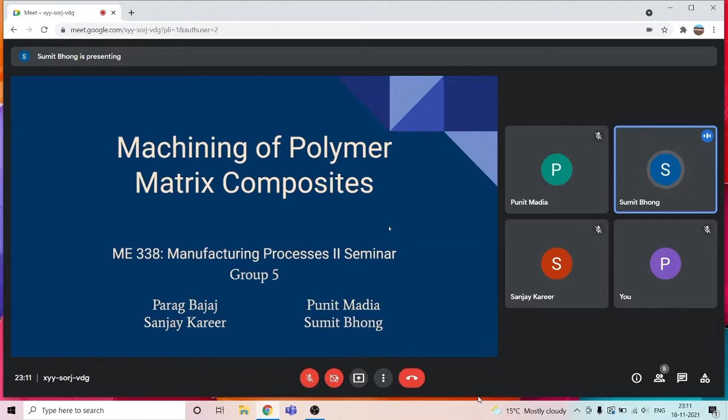Hello everyone, we are Group 5 and my name is Sumit Bhong and my teammates are Parag Bajaj, Punit Madia and Sanjay Kareer. Our topic is machining of polymer matrix composite.

So first of all, let's see what is polymer matrix composite. A polymer matrix composite is a composite material composed of a variety of short or continuous fibers bound together by an organic polymer matrix. PMCs are designed to transfer loads between fibers of a matrix. PMC matrices are typically either thermosets or thermoplastics.

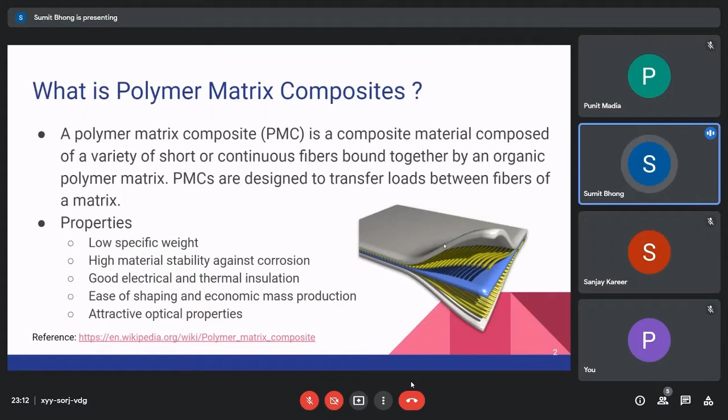PMCs are widely used because of their properties such as low specific weight, high material stability against corrosion, good electrical and thermal insulation, ease of shaping and economic mass production, and attractive optical properties. Now, let's take a look at some exciting real-life applications of polymer matrix composites.

PMCs are used in aircraft and aerospace industry to reduce aircraft weight, which can improve its performance and reduces its cost. In biomedical industry, it is used to manufacture various equipments such as medical implants, orthopedic devices, MRI scanners, and prosthetics, etc. Since polymer matrix composites can withstand extremely hot or cold and other hazardous conditions, they are used in the manufacturing of protective equipments. Some such equipments are shown in the figure below.

PMCs have many industrial applications such as making chemical storage tanks, pressure vessels, valves, impellers, and blades, etc. Polymer matrix composites are also used to repair bridges and other construction materials and equipments like booms and cranes. As shown in the pie chart, more than 50% of material used in aircraft is made up of polymer matrix composites.

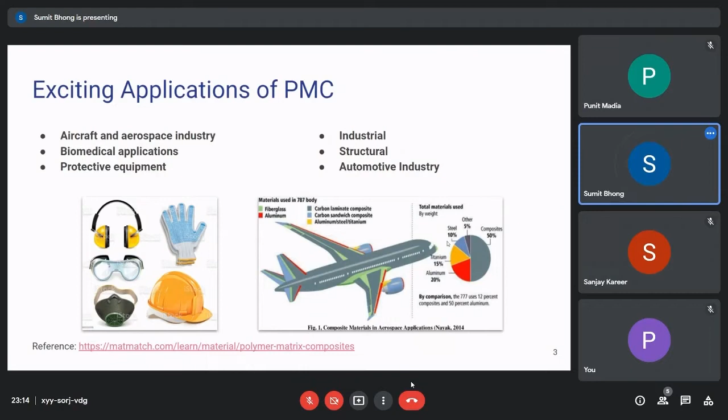Now, let's see some machining techniques for polymer matrix composites. Conventional methods such as turning, drilling, and forming can be used for machining of PMCs, whereas non-conventional methods like abrasive water jet machining, which is currently in use, laser machining, and electrochemical discharge machining is the exciting future trend. Details of these processes will be explained in the upcoming slides. Now, my colleague Punit will take over.

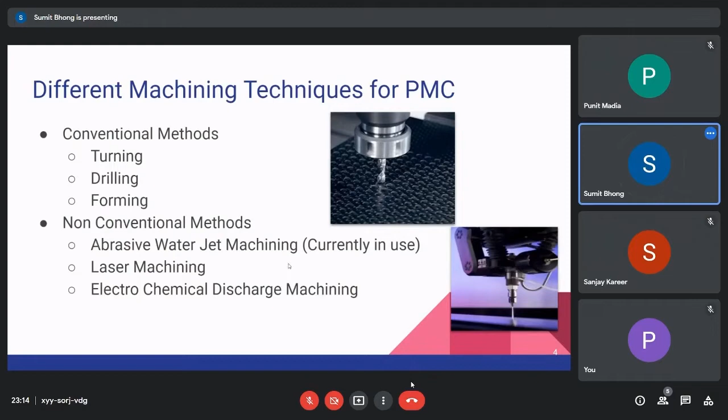Thank you, Sumit. Now I'll talk about PMC usage in automotive industry. To make electrical tape, we use extrusion and rolling as conventional machining process. These tapes are pressure sensitive and designed to protect electrical connections. There are different types of tapes. Masking tape is designed to cover and protect surfaces during painting and repair. Double-sided tape: most factory vehicles use foam-lined tape for emblems, trim, and even securing body panels. Self-vulcanizing tape: it is great for sealing electrical wiring and plumbing.

Now, speaking of automotive thermoforming, automotive thermoforming is the act of heating a single plastic sheet until it is soft and malleable enough to form or shape around a custom designed mold or tool. Three types of thermoforming are vacuum forming, pressure forming, and twin sheet forming. Vacuum forming: a strong vacuum is inserted between tool and plastic to suction any air, pulling the plastic more firmly into the mold and creating a defined shape. This is the least expensive and simplest method that's best for less defined shapes like trunk tubs and dashboards.

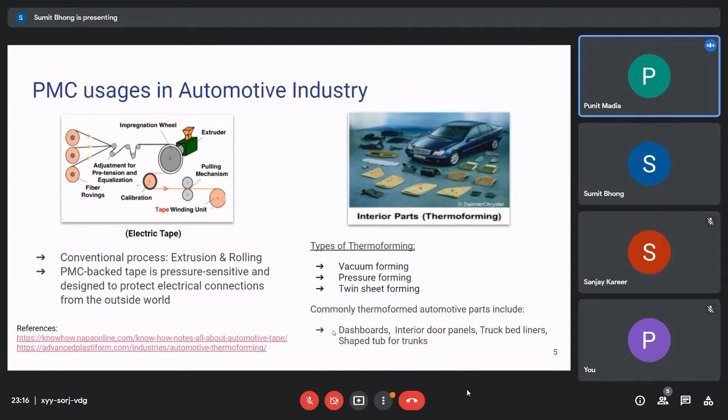Pressure forming: the plastic is fitted to the tool and then blasted with highly pressurized air to press it more firmly against the shape. This requires stronger force than vacuum, but it's easier to get sharper angles and more intricate detailing. Twin sheet forming: it is the most complex method for automotive thermoforming. It's ideal for cylinders, hollow products, and pieces requiring separate interior components. Commonly thermoformed automotive parts include dashboards, interior door panels, truck bed liners, exhaust fans, and shaped tubs for trunks. Next slide, please.

Automotive tires consist of multiple layers bonded together. Rubber is the main raw material used in manufacturing tires, and both natural and synthetic rubber are used. To produce the rubber used in tire manufacturing, the liquid latex is mixed with acids that cause the rubber to solidify. The other primary ingredient in tire rubber is carbon black. Carbon black is a fine, soft powder created when crude oil or natural gas is burned with a limited amount of oxygen, causing incomplete combustion and creating a large amount of fine soot.

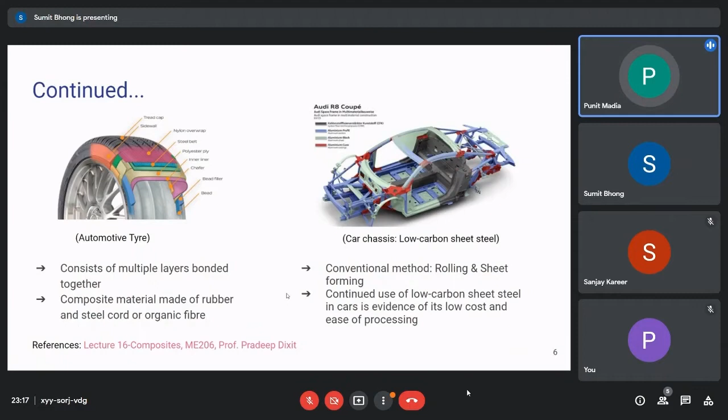Laser beam machining. Laser beam machining is a form of machining that uses heat directed from a laser beam. The high frequency monochromatic light will fall on the surface, then heating, melting and vaporization of the material take place due to impingement of photons. Laser cutting of composites finds wide application in industry due to improved end product quality, low cost, and short processing time. The laser beams are widely used for cutting, drilling, marking, welding, and sintering.

Composite materials are brittle, anisotropic, and non-homogeneous in nature, which makes them difficult to machine by conventional machining methods. Conventional methods damage the workpiece through chipping, cracking, delamination, and high wear on cutting tools. We can see the formula given in the slide that depth of cut T is directly proportional to laser beam power P, and inversely proportional to velocity V and laser beam spot diameter D. Now my colleague Sanjay will take over.

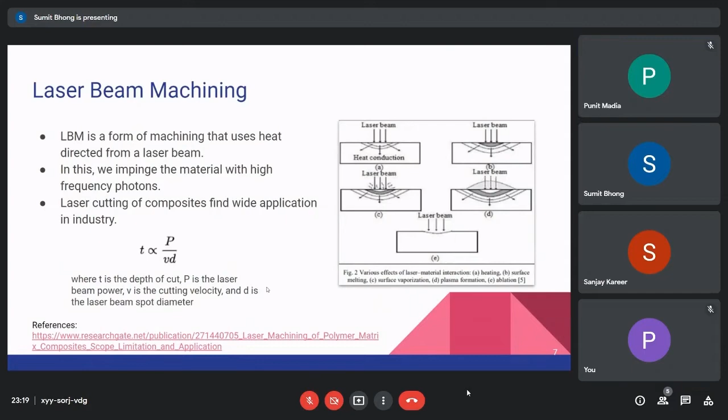Thanks, Punit. In the next few slides, I will talk about abrasive water jet machining. Abrasive water jet machining is a non-conventional machining process. In this process, a beam of water accelerates abrasive particles, and the mechanical energy of water and abrasive is used to achieve material removal. Silicon carbide, sand, corundum, and glass beads are generally used as abrasives of small grain size, typically lying between 10 to 150 micrometers.

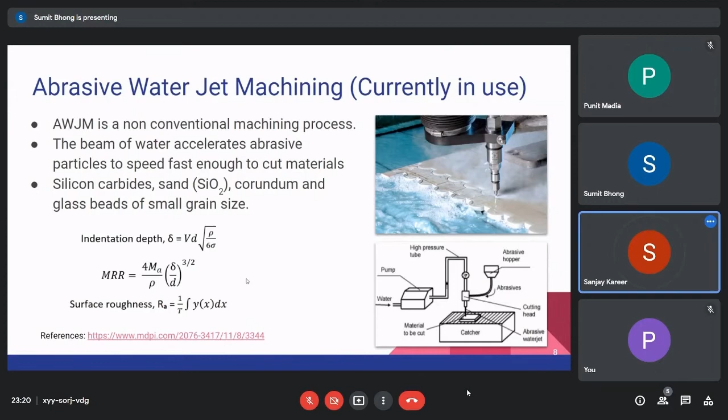Here we will see cold abrasive water jet machining on PMCs. Generally, we use the unique cold abrasive water jet cutting technology due to some of its distinct advantages like no thermal distortion, high machine versatility, high flexibility, and small cutting forces. Abrasive water jet produced clean slits of much higher quality than other processes, and productivity was also comparable to the laser cutting process. The absence of thermal distortion is achieved due to its cold cutting process, since the material temperature will not exceed 70 degrees Celsius.

Now, I will tell you about this flow chart. There are several factors which affect depth of cut, surface roughness, material removal rate, kerf geometry, and nozzle wear. This includes hydraulic parameters, which include water jet orifice size and water jet pressure. The other one is abrasive properties, which include abrasive grit size, abrasive material, and abrasive flow rate.

The next one is workpiece material, which includes the composition of the workpiece material and hardness of the workpiece material. The next one is focusing nozzle, which include bore diameter and tube length. The last and most important one is cutting parameters, which I will explain in the next slide. Cutting parameters include traverse speed, standoff distance, and angle of attack.

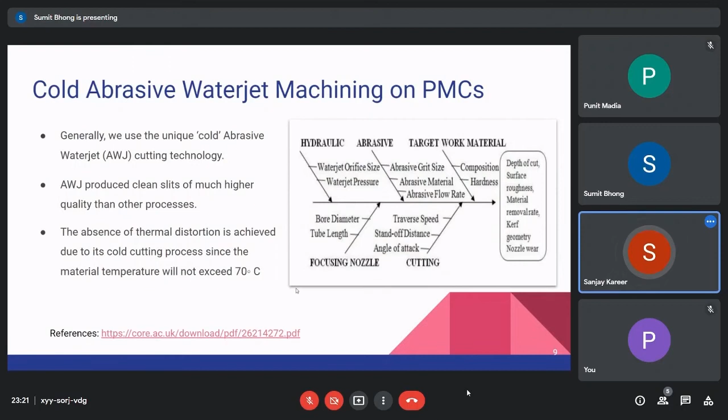Next slide. In this slide, we will see various cutting parameters which affect surface roughness in abrasive water jet machining. In the first figure, we have compared pressure and surface roughness. As you can see, with increase in pressure, the mean surface roughness will decrease. In the second figure, traverse speed and surface roughness were compared, and with increase in traverse speed, the mean surface roughness will also increase. In the third and last one, standoff distance and surface roughness were compared. With increase in standoff distance, the mean surface roughness also increases.

Now, my colleague Parag Bajaj will take over. Thank you so much, Sanjay.

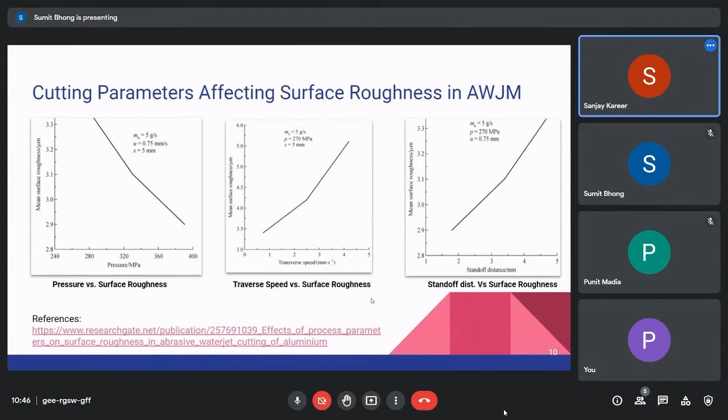Now, I will talk about some of the future trends for the machining of PMC material. The process is the ECDM process. ECDM stands for Electrochemical Discharge Machining, and its optimization is done with differential evolution algorithms. The process parameters of ECDM are voltage, electrolyte concentration EC, inter-electrode gap IEG, pulse on and pulse off, and the duty factor.

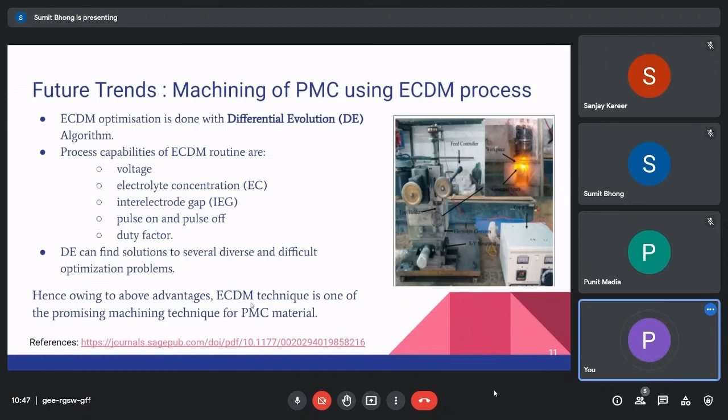Differential evolution can find solutions to several diverse and difficult optimization problems, and hence it is very useful, with solving capability for non-differentiable, non-continuous, non-linear, and multimodal problems. Hence, owing to the above advantages, the ECDM technique is one of the promising machining techniques for PMC material. Next slide, please.

Now I will tell you about some of the challenges faced while machining PMC materials. The first one is difficult machinability. It is due to the reinforced abrasive material properties. The second one is increased tool wear. Reinforced particles like silicon carbide deteriorate the tool surface. The properties of the phases used in the material are usually different, which makes machinability difficult.

The thermal conductivity of PMCs is very low compared to fibers, hence the laser beam machining process is not very viable. AWJM cutting processes still face challenges in terms of quality and productivity performance. Cutting defects have also been reported when using an abrasive water jet machine. Damage may vary depending on the workpiece material used.

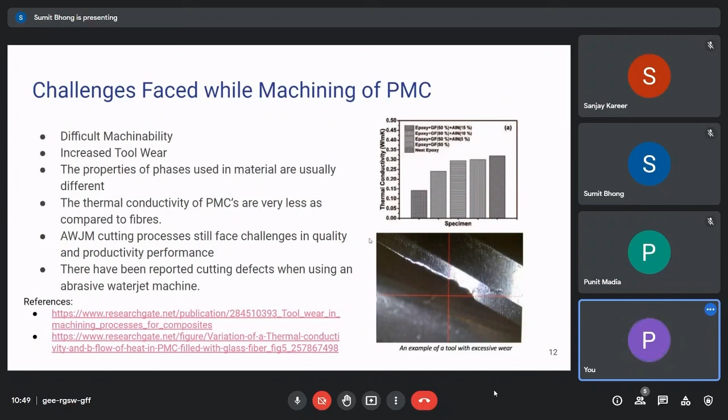In the above graph, we can see that as the concentration of aluminum nitride increases, the thermal conductivity also increases. Hence, machinability is easier. In the below figure, we are showing an example of a tool with excessive wear. Next slide, please.

Now we have come to the conclusions on machinability of PMC materials. As we have already said, PMC is extensively used in the aerospace and biomedical industries due to its low weight and better performance. Low machinability, low thermal conductivity, and increased tool wear are some of the major concerns while machining PMC materials. AWJ is a relatively efficient machining technique and is currently in use for producing good quality cuts and surface roughness. Laser machining is also used for PMC as it is quite economical and has short processing time.

ECDM is primarily dedicated to machining non-conductive material. It aims at finding the optimal values of various parameters, that is EC, IEG, DF, and voltage, such that maximum values of material removal rate are obtained.